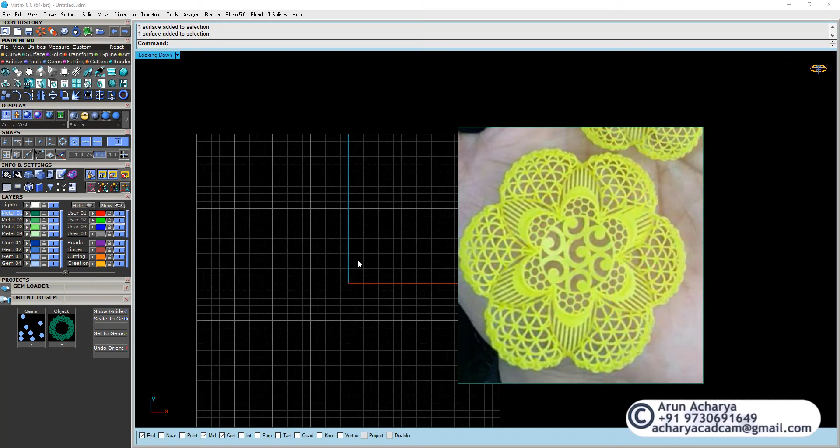So let's see how you can do such a design. All right, well, it's quite an easy design.

First of all, like every time we do, we have to fit it inside the measurement. So here the diameter is around 60 millimeter, or let's do it for 40. I don't know if it's exactly the same measurement, so I'll just move it to the center, and then I will scale it a bit.

Make sure it's touching all the corners. I'll scale it again from this view, and as you can see, it's almost inside the circle. So here it's a bit out, but that's fine, we're not gonna pay attention over there.

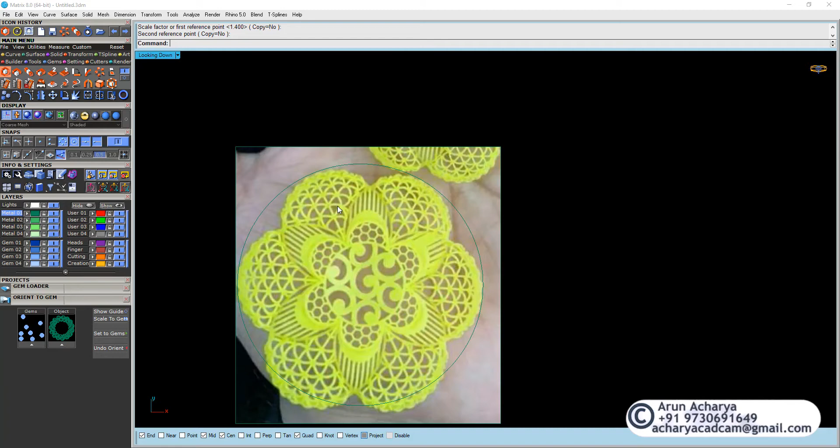The command over here I'll be using is smash, and then we're gonna use UV curve, or we might use smart flow. I prefer smart flow if it's more like a squarish surface, not a triangle.

For example, here it's a bit of a triangle kind of surface. So let's see, maybe smash would be handy over here.

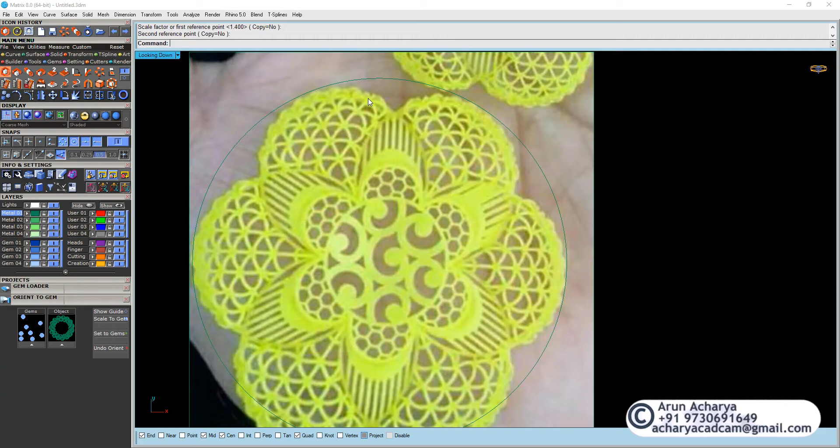So let's just begin. For the center design, we're just gonna trace it, the usual way we do it. I'm not gonna draw the actual design because I just want to make this quick, just to show you the technique. It's not really important to complete the design, but to show you guys which technique to apply.

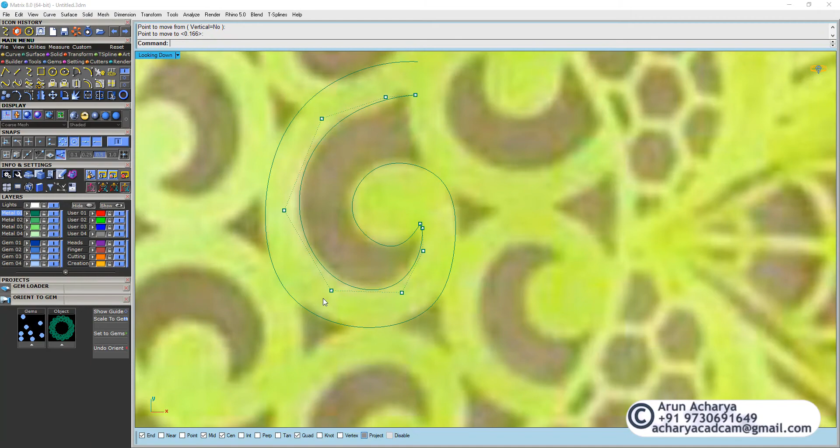Okay, so this will be a normal extrude.

I say that I don't want to do this completely, but at the same time I just cannot leave it looking ugly. So I take this time to fix it, and for me it's fine.

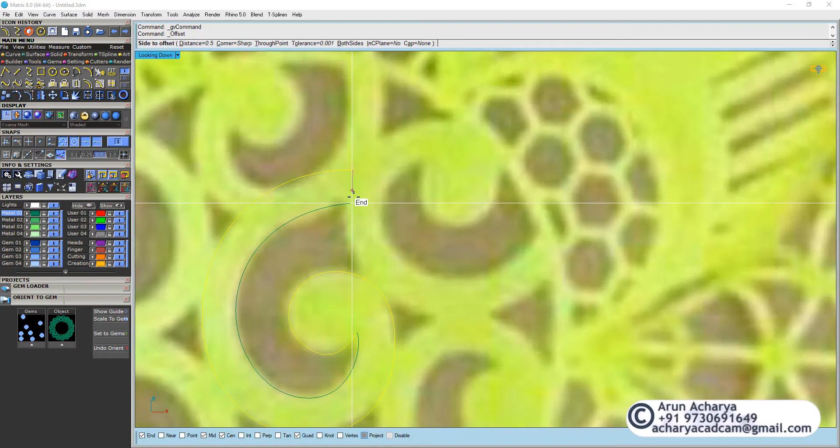I don't know how much is the distance here, so let's just check. That's around 0.8, so that's fine. A circle here, and you offset this around 0.5.

Now the minimum thickness on this design can be 0.25. Yes, you heard it right, 0.25. You can keep it 0.25, but you need to have a high quality 3D printer and a very good quality wax injector.

Even if you print this model on a high printer where it's printed in a harder resin, like one you can't cast, the only option is to make a mold. But sometimes you make designs where such thin parts are a bit difficult to get out from the wax injector.

So make sure you have, I suggest Yasui is the one I have seen. I've watched the performance of the wax injector. The one I saw was the ultimate one, a wax injector with the vacuum system, and the result was amazing. It was simply the best.

And again, the Yasui casting machine was the best. I saw the pieces, and the result was amazing. This tiny detail was perfect. Nothing beats Yasui so far.

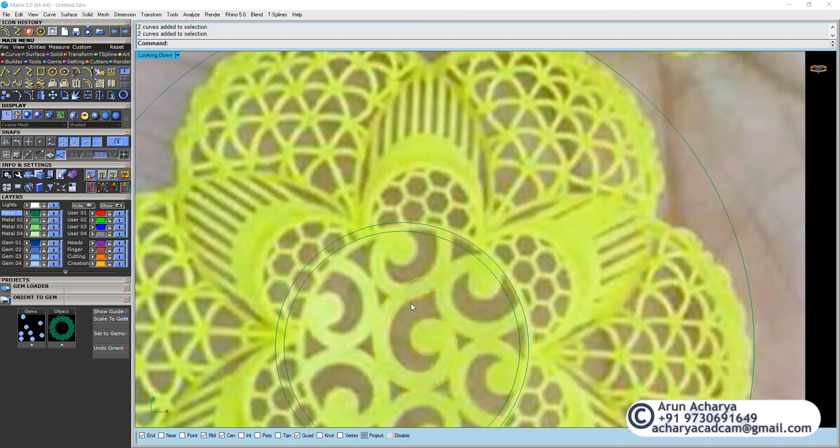I don't know if you guys know some other machine, but this is my view on these designs, especially very thin tiny details. If you guys know something else, do let me know. I will see at a near exhibition how it really works with such designs.

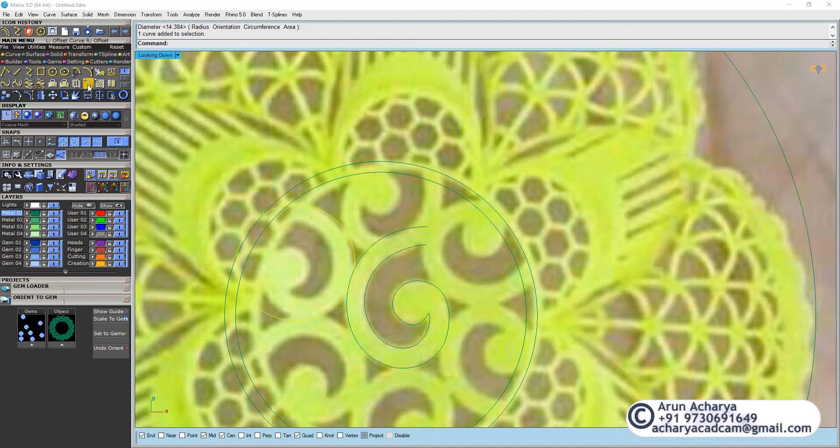Okay, so for the moment I'm just gonna do a round design here. I don't want to work on it much, so I'll just do an array here, not so much.

Alright, so we have the design ready. This is it, the first one we're gonna do with the surface. So the surface can be a sphere here, something like this, and you just scale it down like this over here.

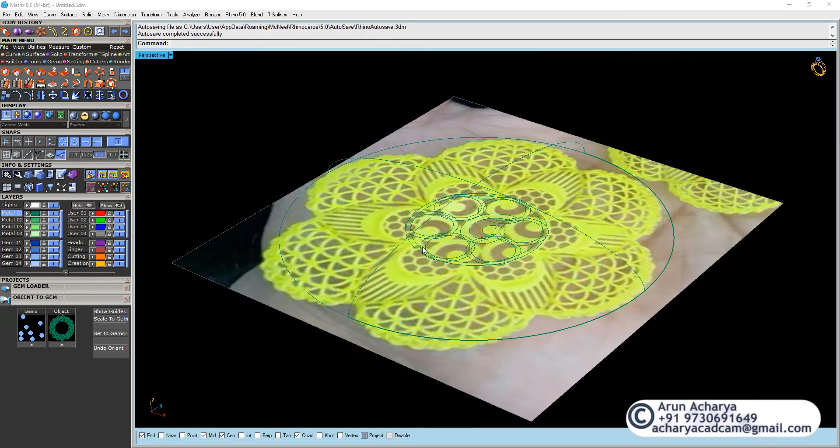Okay, the next step is to do a boolean and then just cut this out. I don't know if you are watching my videos regularly, I prefer to keep the edges on the side. This way I avoid trimming on the edge, but I see maybe I have an edge over here. I'm not sure, but let's see that.

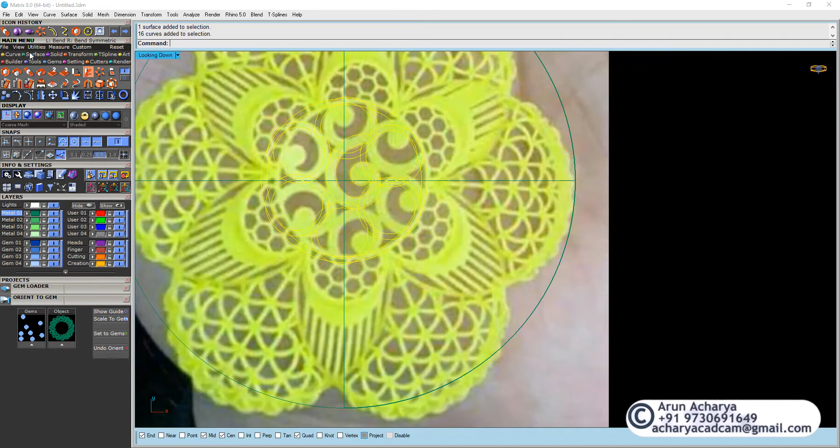Let's see. So just do a boolean here.

Everything is yellow here, and I really can't see what I'm doing. Sorry for that. So let's just hide this image. Yeah, now I have a proper image, a proper view.

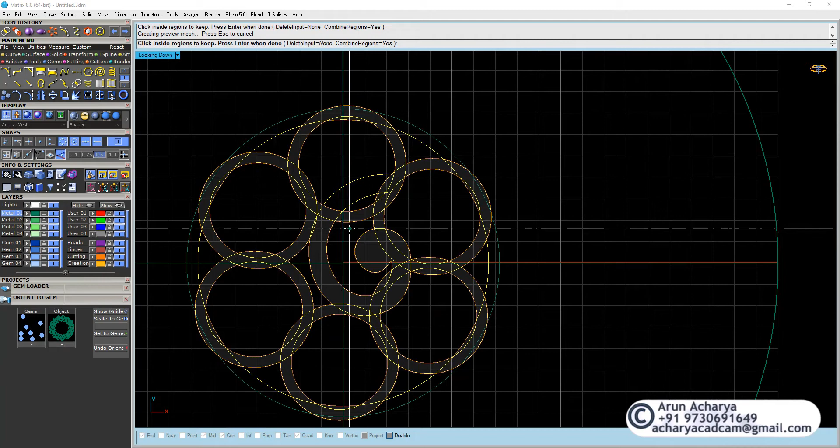So I'll select these areas where I want the design to stay. Okay, see, okay, yeah, there you go. So I'm just doing a quick design part.

Okay, I didn't select the option delete input all. So what I will do here is just copy to clipboard, undo, select everything, but just remove this circle and the surface, and delete this, and you paste it, so you don't really have to redesign everything.

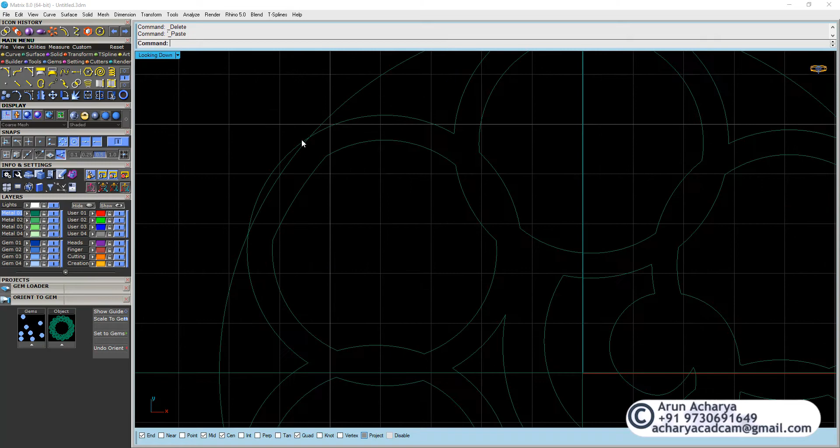And again the same mistake, so I'll just put all. That's it. Okay, so here's the design. I know it's not matching, but this is just something quick.

So once you have your curve, you can just trim this surface. Select the trim option, and I guess I trimmed the wrong side. Surface, trim the outside one. Yes.

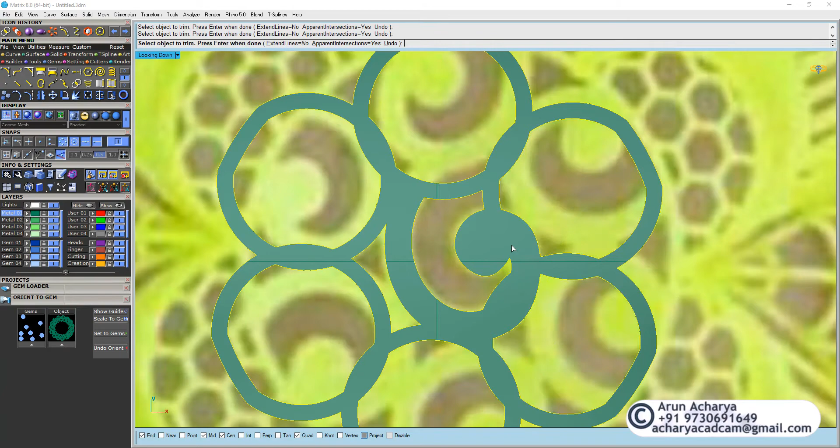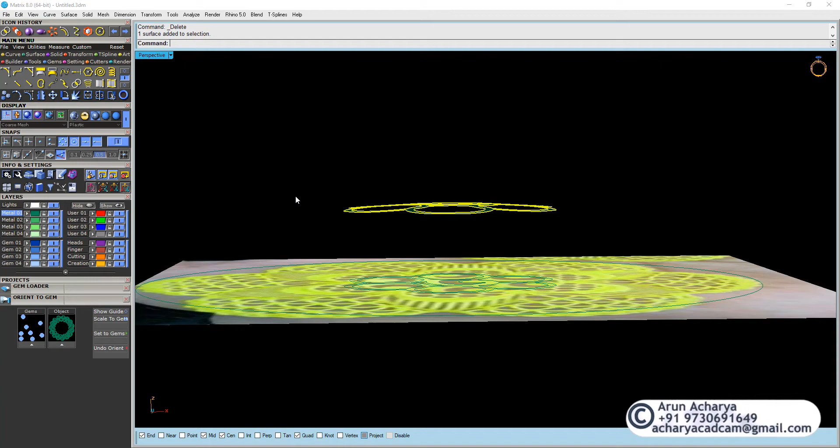Okay, so as you can see, I've used a trim, and the surface was a bit dome. So that's how you do a dome part. You make a surface, a sphere, you just scale it down, and you judge the dome how much you want to keep it. In case you want more dome, you just have to keep it a bit higher. Okay, a bit thicker, so you have a domed one.

Or if you still want to play with the points, you can still do that. So we can just shrink this surface, get some points on it, and you can raise those points over here. So I'll just raise this up like vertical and something like this. Okay, it's not really looking that good, but you can just do a scale 1D here.

Make sure the ortho is on. Okay, so you can adjust the dome even if you trimmed it. That's not a problem, and you can still see the design from the top. It's completely fine. There's no problem with that.

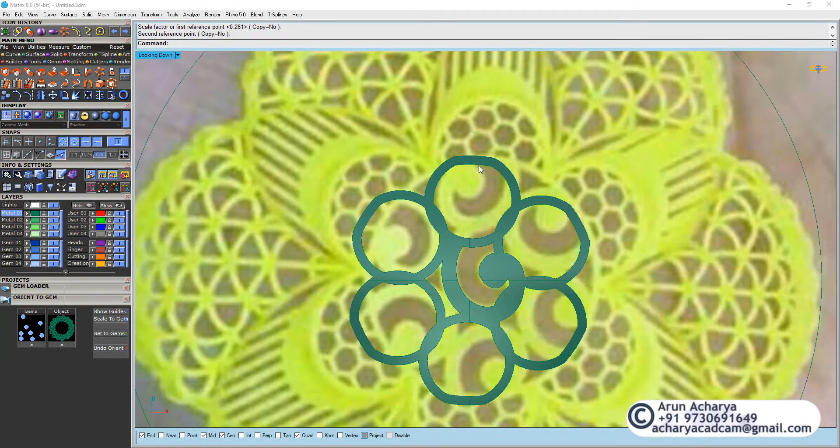Okay, so this is one of the options. So for the rest, you can do the same.

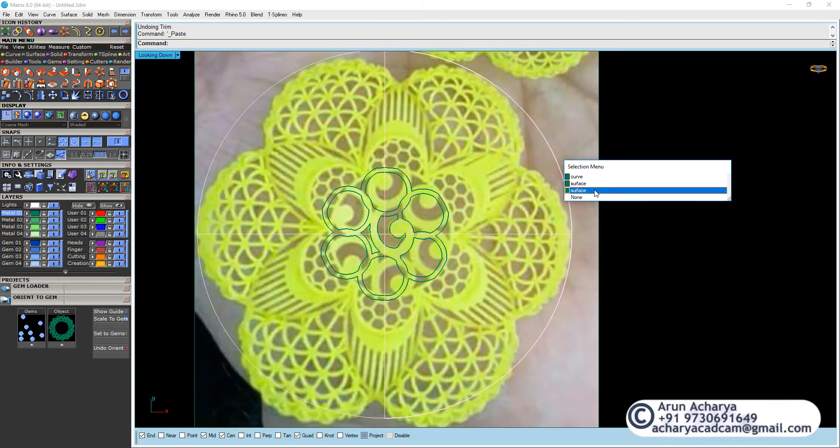So here what I want to do, I will just copy this to the clipboard, and I'll go back to the surface where we didn't trim it. So I'll use this as the basic dome shape for this design, and lock this one.

Alright, so this gonna be the same thing. Just make sure you have a curve here, you make another one. This pattern you can just draw this outside. Okay, let me show you how to do this.

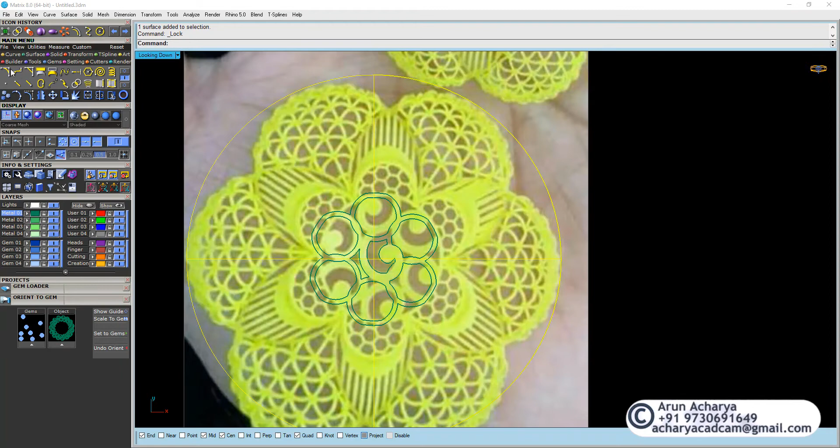Take a curve. Actually, I'm going to modify the design a bit, like, you know, I'm not following the same design, but just to give you an idea of how you can really get this on.

Okay, so I got this two curve here like in a guide, I would say, and then start point end to end, and can be here somewhere.

We do the same here again. See, start point and something like this. Okay, and the inner design, it's gonna be the same like I said earlier.

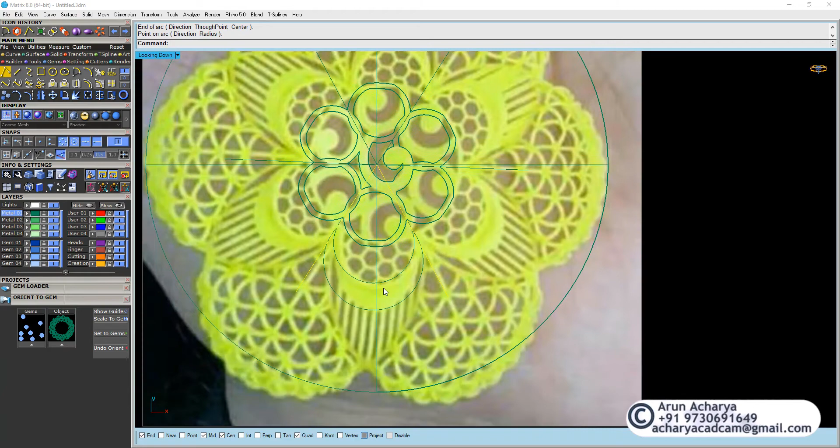So make sure you make everything inside this line, because eventually these are just an array polar, so just a copy. So we're gonna achieve that later on with the array polar, so you don't waste time doing each of them separately, and this one over here as well.

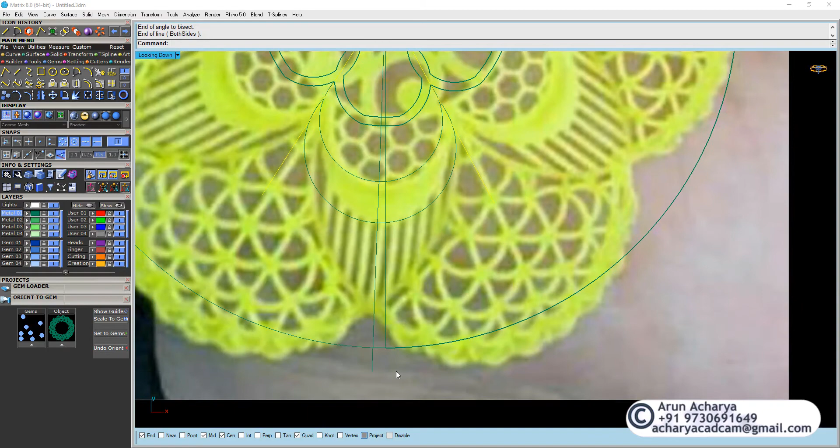So here I'm going to use a bisector line for another guide, so that is from here to here, and exactly this is the line here, and you can actually fix it in a proper angle.

So I'll just rotate this a little bit so it's going exactly down. Okay, I shouldn't have moved this one, so unselect, and yeah, that's it. Change it to red, so we actually don't select that often.

And a circle, sorry, an arc here again. Make sure you're using the guide. Now the image is a bit tilted, so that's fine. I'm going to use my guideline for my proper judgment.

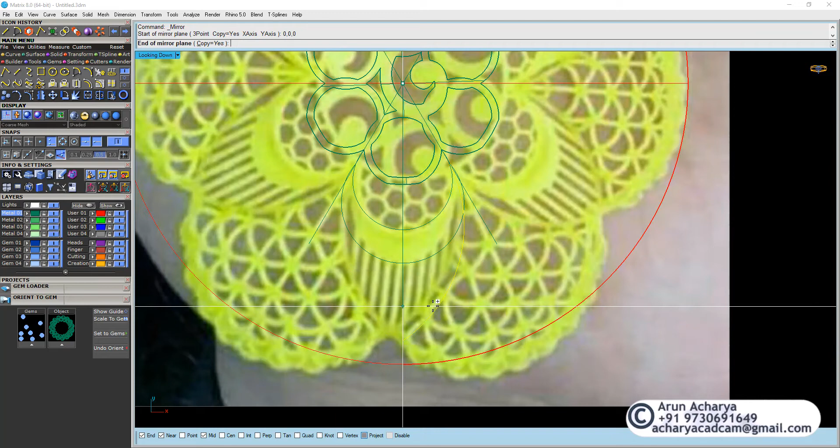So it's going to be like this, and you mirror this and you draw the line inside. So join them, you make a line here.

And you can offset. So as I said, 0.3 would be minimum, so I'm going to do 0.3 divided by 2, that's 0.15. And you can do the array on it, so let's just do array on this side.

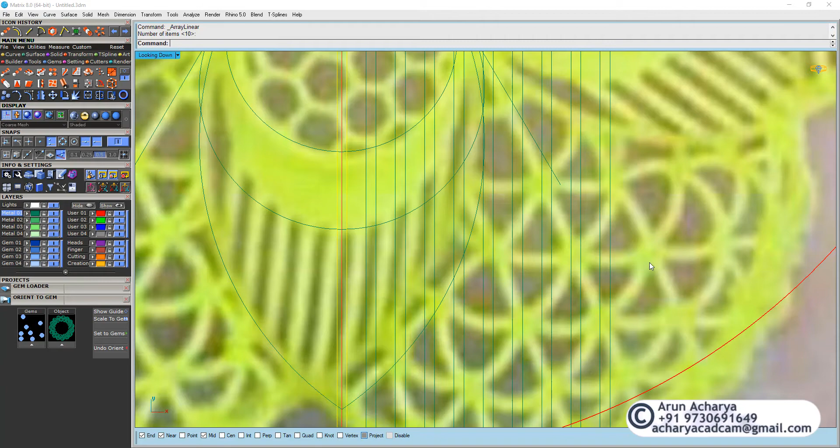Array linear would be fine. Number of copies is going to be 10, and we drop it like this. So the extras, we're going to delete, and yeah, let's just keep this line the same over here.

So now I have the surface, I have these two curves here, and I'm just going to draw one more curve, and I'll make it a bit dome. Okay, now for this surface, I would just draw a curve.

I'm going to rebuild this. For some reason I feel they're not in the right place, but let me just zoom it. Yeah, exactly, they were not actually. What is this over here? Okay, this is the arc, so just delete this one. I'm going to draw a new one.

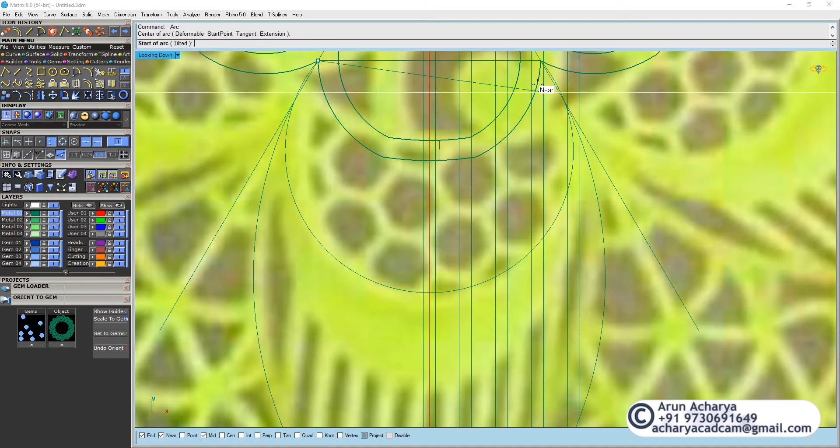Start point, so from the end to this end, and so somewhere like this, and start point again, and this over here. Okay, so we have a curve here, and I'll just rebuild this one.

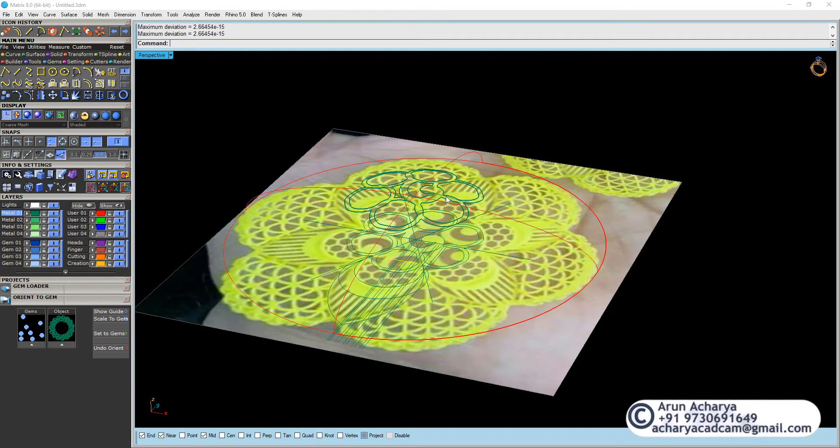I'll move this up. Okay, so here's the thing, I'm going to project this on the surface. Okay, something like this. Yes.

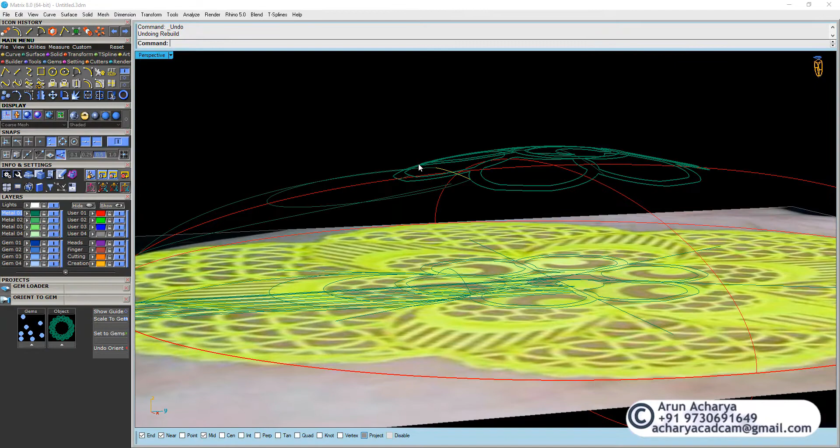And here's what I have to do again. Just rebuild this one and raise those curves up a bit, or you can keep them at the same level, in case you don't want to move it up, because eventually this is on a higher side, on a higher level, so we just cannot overlap this design.

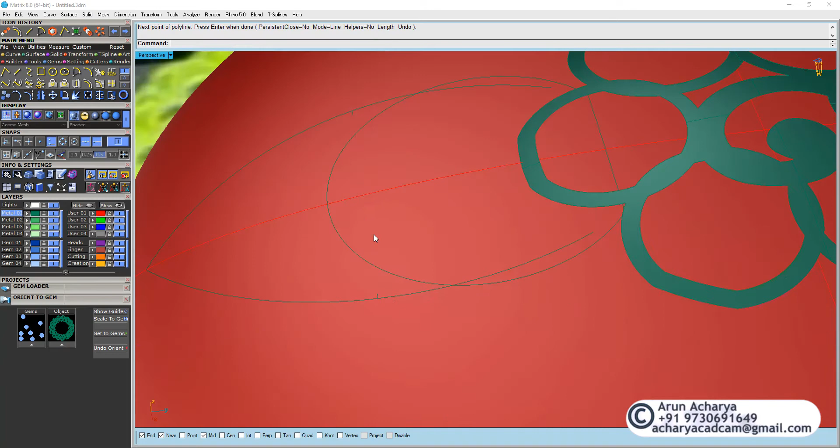Okay, so you keep this on the same level and you draw another line from here to here, somewhere here. Okay, and you rebuild and you raise it up so that when you do a sweep 2, this will be a bit raised.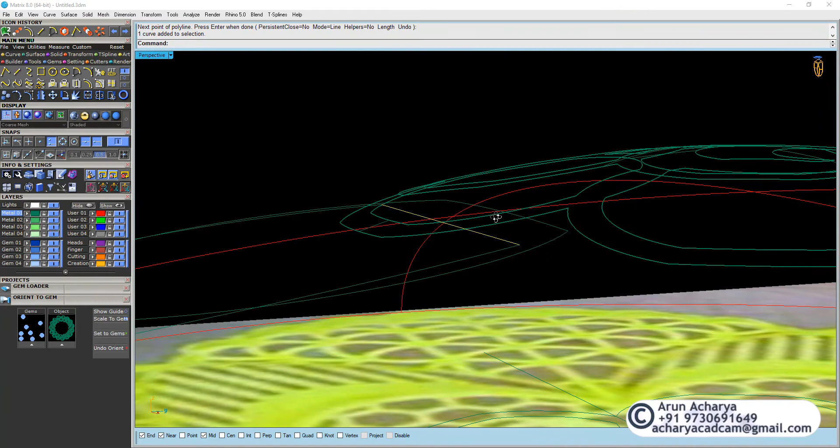Okay, so surface, sweep 2, select. Okay, I need to explode them. Explode, sweep 2, click here, click here. I think I selected the wrong one, so I'll just draw quickly a line here. Alright, forget about that, that's fine.

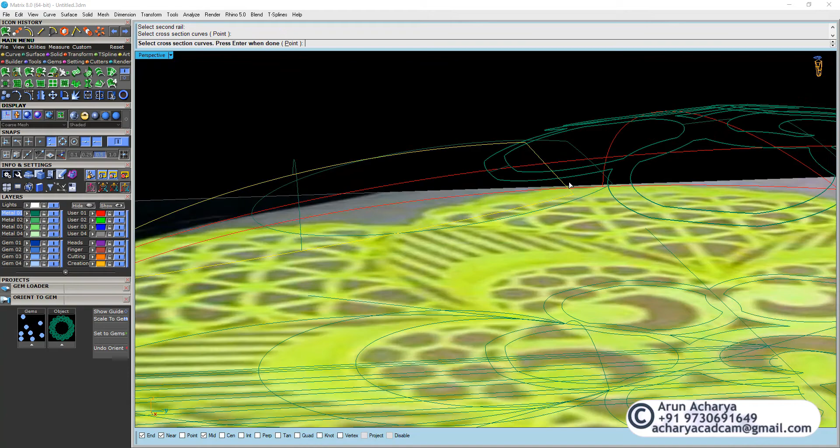So a surface here. Okay, I'm doing a sweep 2 again because I made a mistake. I selected this first. I should have selected this at the beginning, then this, and then point, and then in the end. So this way I'm going to have a different surface.

Okay, and for some reason, if you're not happy with the shape, you can always change that, but right now I'm just showing you the technique. So let's focus on the technique and not on the actual result. You know, you can just raise this curve, the section, and maybe you can do a sweep 2 again, and then you will find a good result.

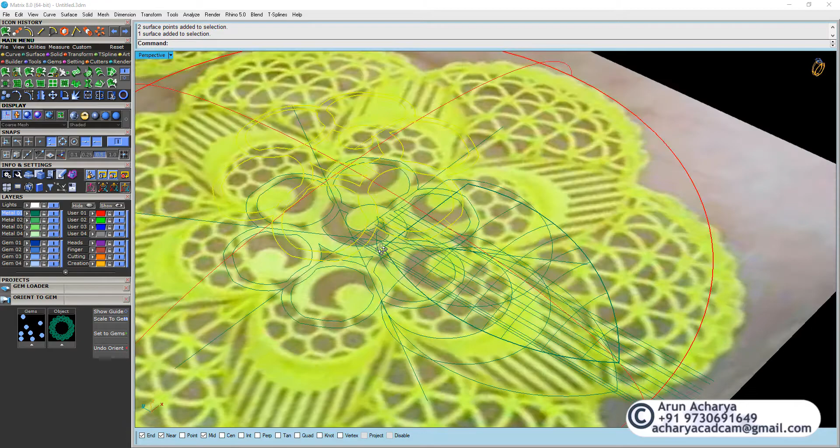Okay, so the story is actually that this is a bit dome. I think it's a bit more dome if you look at the wax piece here. Okay, but that's fine, you can control this. You just need to know how you can do such a design.

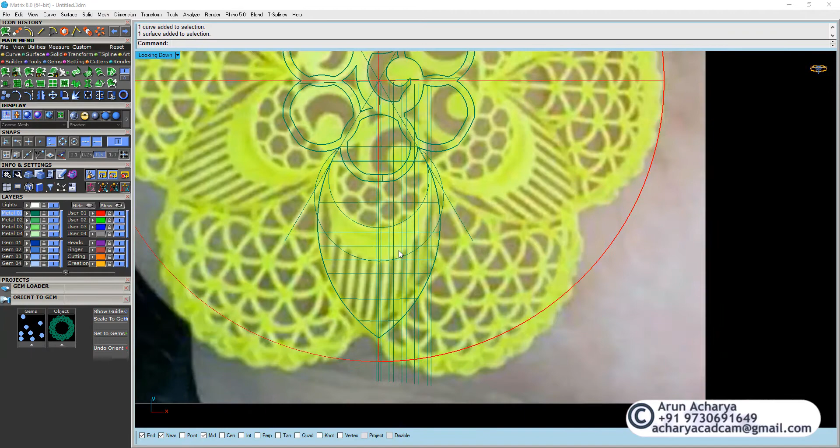So once you have the surface, you just have to draw the pattern down and project it on top, like we did for this surface. Okay, so everything is the same. So I'm going to use the same pattern, like an easy pattern, just to be quick.

Okay, this background is okay. Let's just do the 2D part now. So once you have this one, I just mirror this on the other side.

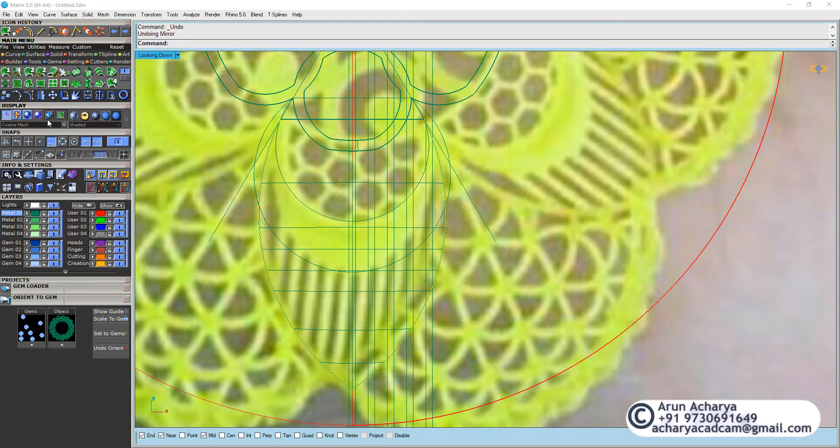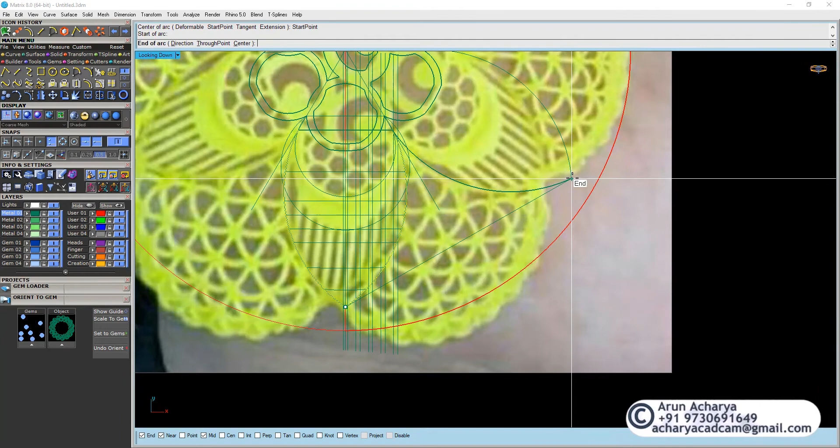Curve. Okay, alright, so we have the other pattern here, and then we'll do another surface that is from here again, so something like this. Let's see our actual curve here. So project.

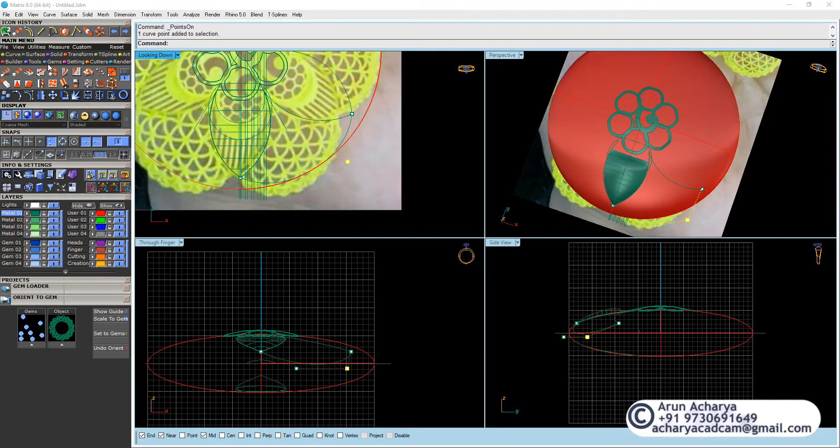Oopsie, it's out of the sphere, so not a problem. We can just rebuild this and bring it inside. Project again. Okay, there you go, that's much better.

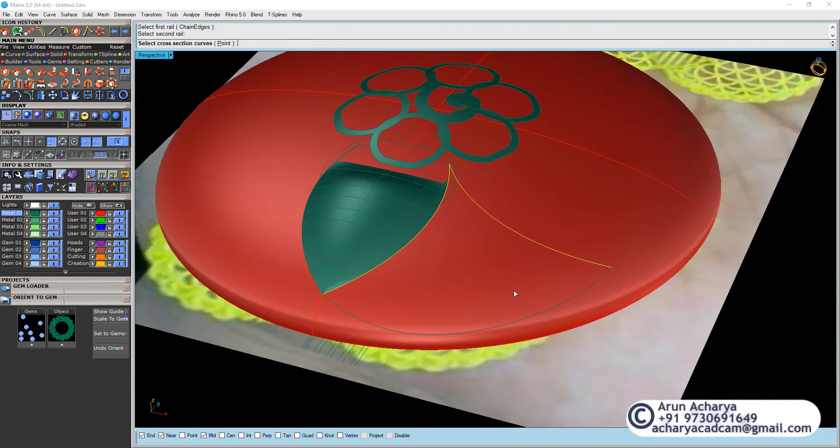And you have this shape. Alright, so what next? You do a sweep 2 again, like I explained earlier. One here, one over here, and one over here, one here, and this one. There you go, perfect, so you have the surface over here.

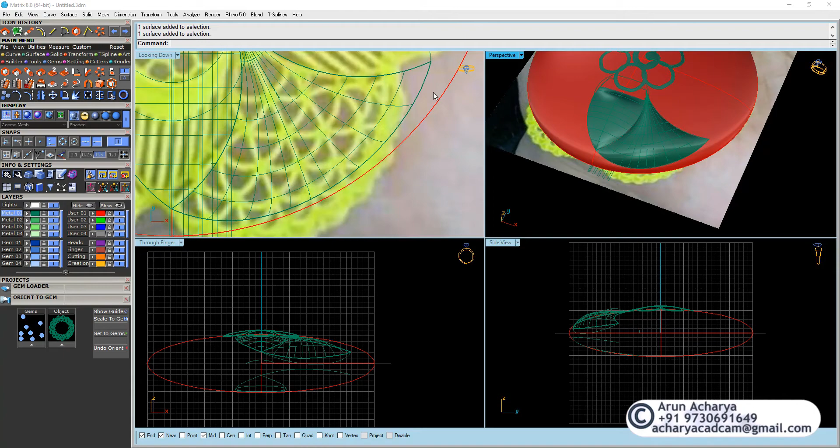Okay, now let's try to smash this, because actually this curve over here, they are much more organized, so we cannot just project them, and if you see, they are going a bit down as well. So I have to try with smash.

Continue, yes, and this might give me a result or might not give me a result. So here we have this curve here, I'll just move this aside around 20 millimeters, or 25, and now we can get rid of the background. Actually, it was disturbing me a lot, so just hide this one.

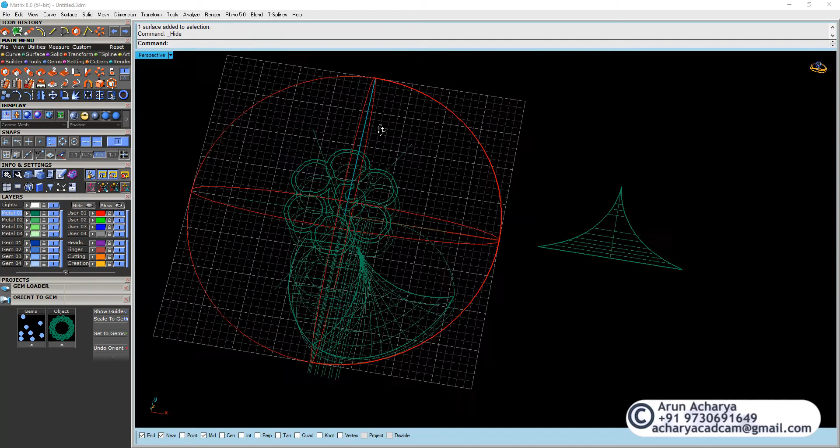Obviously this is an advanced level, so if you guys are missing few points, please don't blame me. You need to be on the expert, on the intermediate level to understand what I'm doing. If not, just go back and watch again carefully.

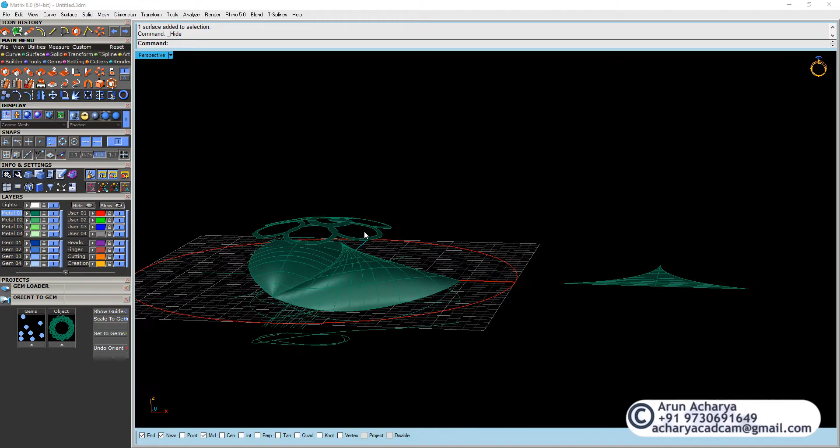Okay, so we have this surface where I'm gonna just project this one, this one which is double, copy down, we just delete them. And this one especially, I'm going to use a smash command. So I did a smash on this one, and this is what we got.

And I'm going to try a smart flow on this one, but before I do, I just want to make sure the curves are good when you flow them on a surface. So how do we know if it's good or not?

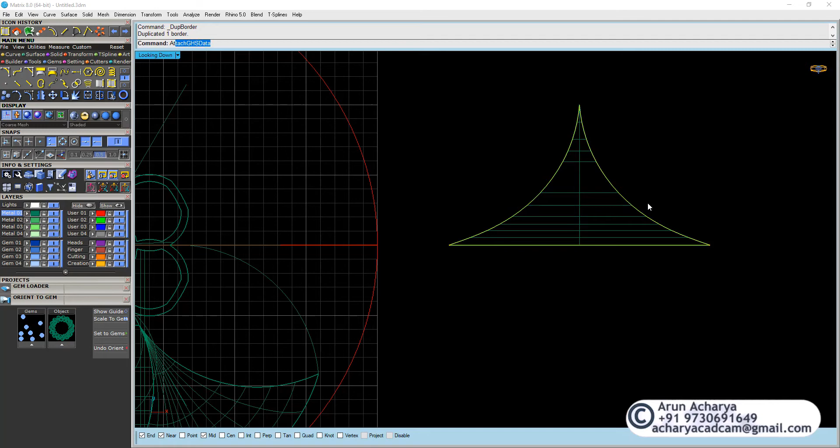So I'm gonna do a quick hatch on this one. For the hatch, I'll need a duplicate border, and once I have this curve, I'm gonna do a hatch, and I'll use this one, the grid one, and the scale should be somewhere around 5, I think. 5 is good, yeah, 5 is good. And you explode them, so once you explode, it converts into a curve, and that's what we want.

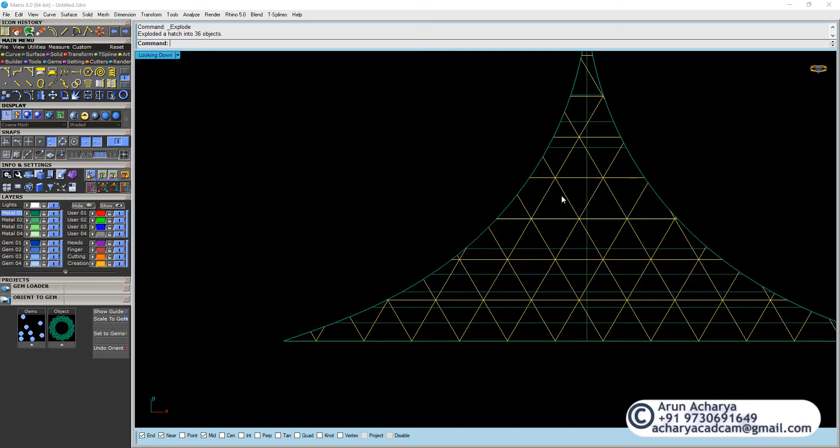Okay, so here's what I have to do. Actually, I have to trim them. I'll just hide this one. I have to split them against each other, so I don't know if this will work, but let's just try.

I have to group them, so I know that this is the first batch, so I'll just group this and select this all, and I'll just group this one. So split this with this, and split this with this.

So let's just ungroup and see the result. Yeah, perfect. This is what I wanted, each of them is separate, and yeah, perfect. So just rebuild this with around 4 points.

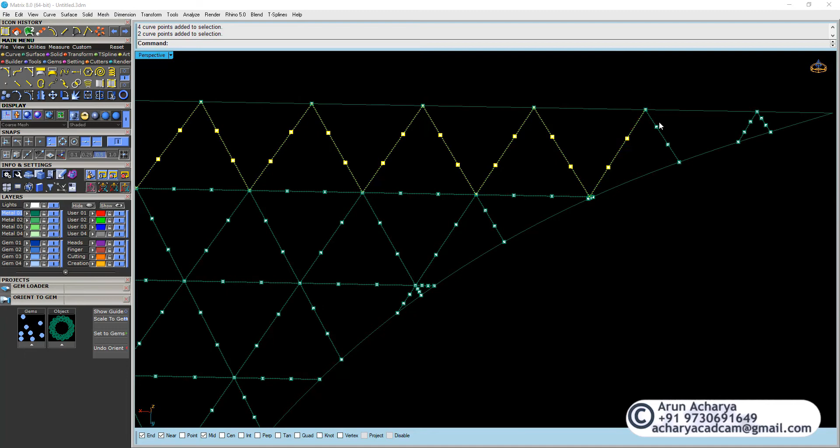And here comes the tricky part. You just have to select these 2 points, the one which is inside, not on the edges. So you select these 2 points, and you do the same over here. And you can flip the angle, and you can select more points.

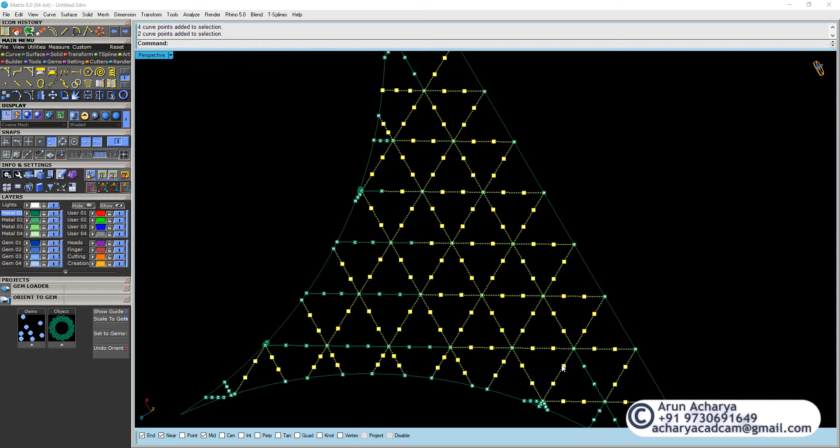Okay, and we just raise this vertically around 0.3. Yeah, so we get such a pattern. Okay, I know there are a few curves which are still flat, but that's fine.

We just need to do a test. So bring this back surface, and let's change the color. And here's what we have to do. We're gonna do a smart flow now using these two surfaces, and we'll see the result, how it's reacting to the surface. So the base surface is this one, and the flow is this one.

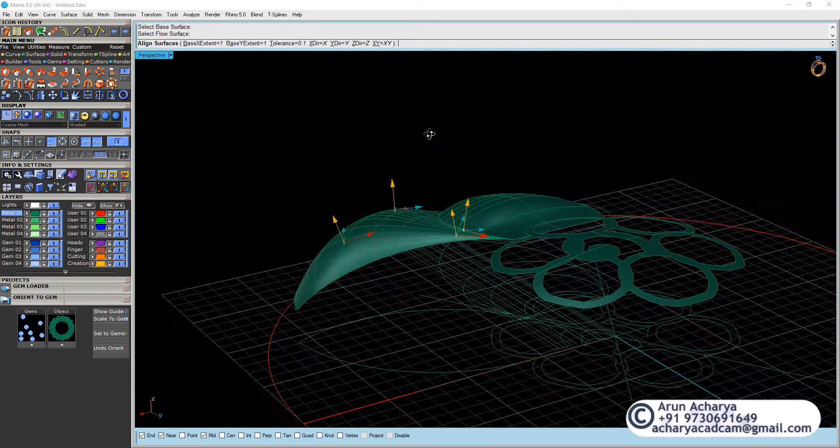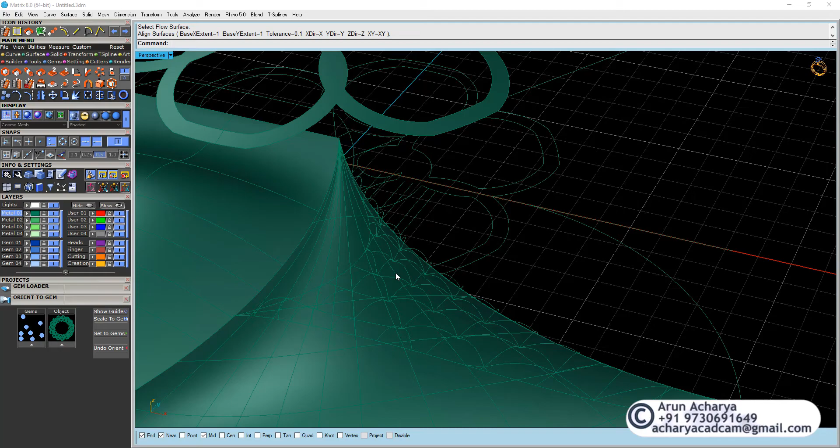Okay, so for the moment I just press enter, and okay, it's good, but it's not good. As you can see, this curve, if you do this on the surface itself, it would take a hell lot of time. So with the smart flow it was actually a bit easier, but the thing is the result is not what we're looking for.

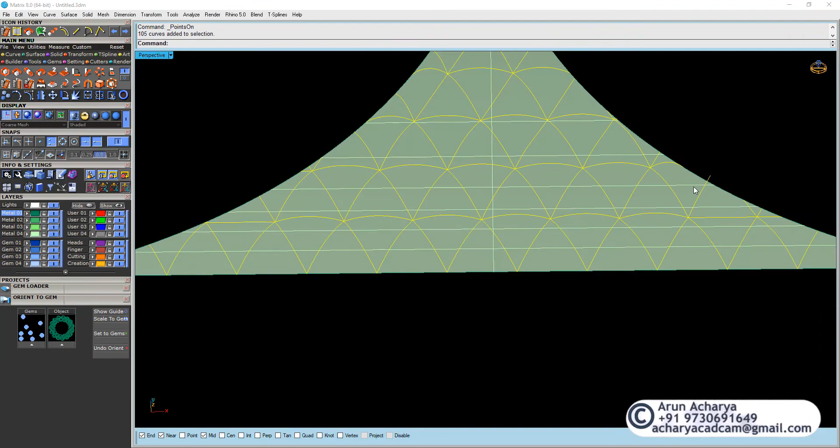So I'll just try again, and I'll see what would be the best corner. It happens to me, especially when there is a 3 edge on the surface, I don't really get a good result. Okay, so well, over here there should not be any reason not to achieve a good result, but let's see. Maybe I'm doing a mistake here. I really don't know.

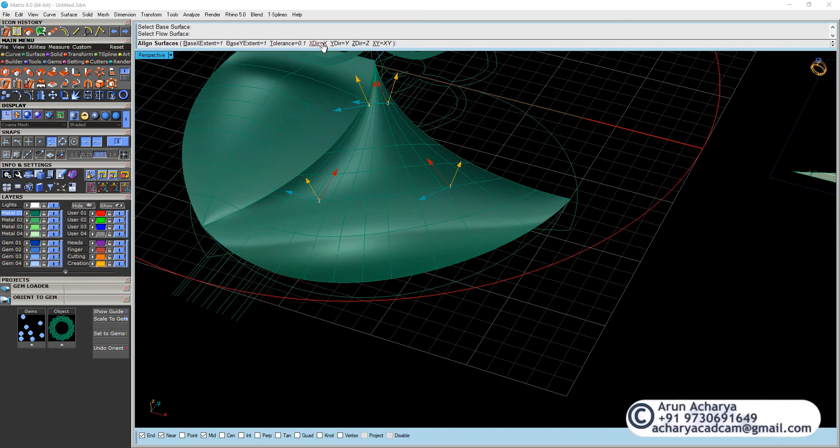Let's try with this corner. No. Or maybe is it the shape or the position? Okay, let me change something here. Flip X. No.

Smart flow rigid. No. Smart flow break. I'll just do a flow along surface instead. Select objects. Yeah, enter. Select the base surface. Select target surface.

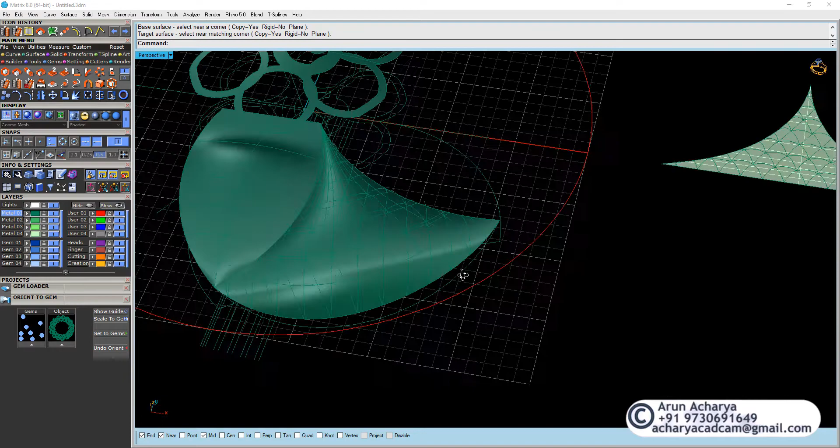Wow, this is what happens. Okay, so I got the result, as you can see, and I'm quite happy with it, but I was trying to do this with the smart flow and I failed, but flow along surface was perfect. Okay, so ultimately you got the result, what you actually wanted to do.

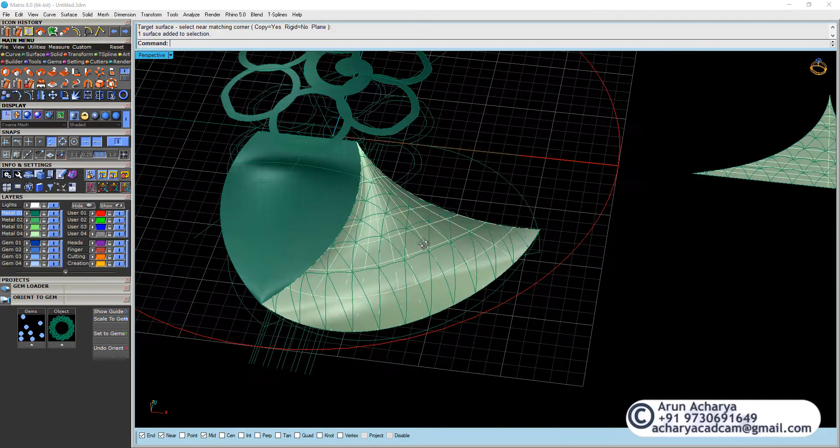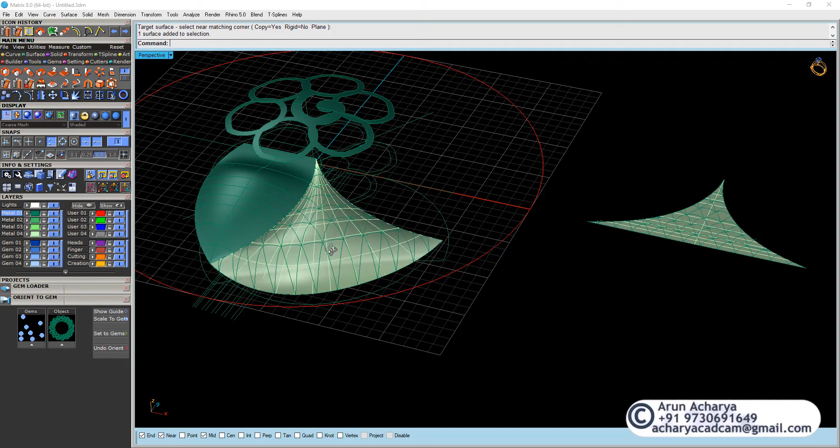So once you have this result, you can play here, do any kind of changes. But this is the best we can achieve if you have a surface which is a 3 side edge. It's not squarish, so sometimes it's a bit hard to wrap something around the surface. So this is a very good option. Smash is very handy over here.

Alright, hold on a second, I'll just change the color here. Okay, so if we want to select this curve which we just projected on the surface, we're going to use the command Select Last. I hope it works. SELLAST, enter, and there you go - blue color. Okay, that was the surface, not the curve.

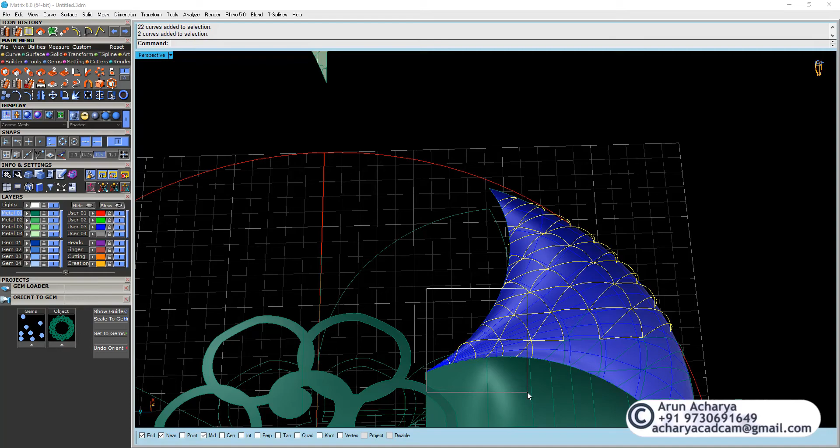Alright, fine. So just do a window selection, look for a better view, and select them randomly, and once you do that, switch to another color. So this is what we are looking for, and I hope you understood the technique.

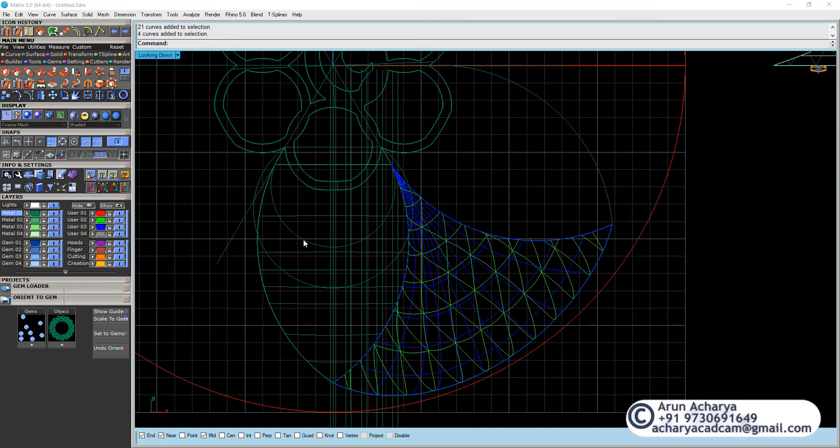Now let me just do something over here, let me just draw something. But before I do anything, I just want to lock all these curves which I'm not using for the moment, so everything is locked. And this is the curve, this is the other curve, I hope it's the down one. Let me have a look. Alright, I lost my selection, it's fine.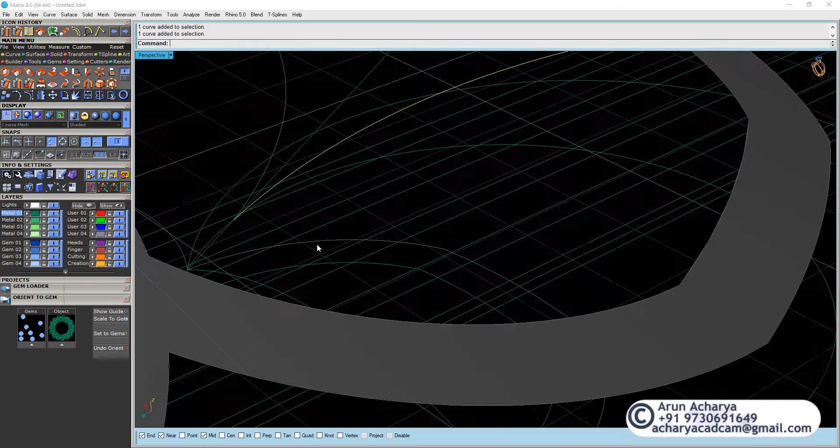Okay, this is actually not touching over here, so what do I do? I can just select this curve here, for complete selection. That's fine, I think that's fine for the moment. And we'll just select this and we'll just mirror this on the other side.

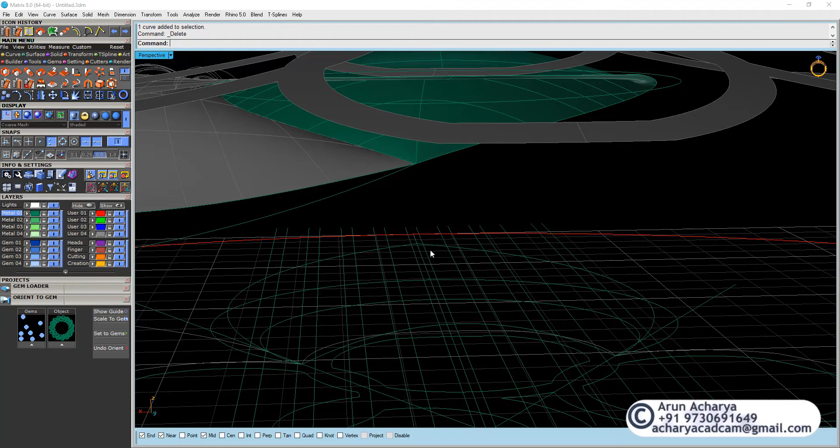We're gonna delete this as well, and we select all together, and we're gonna do a curve boolean. So curve boolean, and here it is. Let this be a complete selection, so just do this a complete selection.

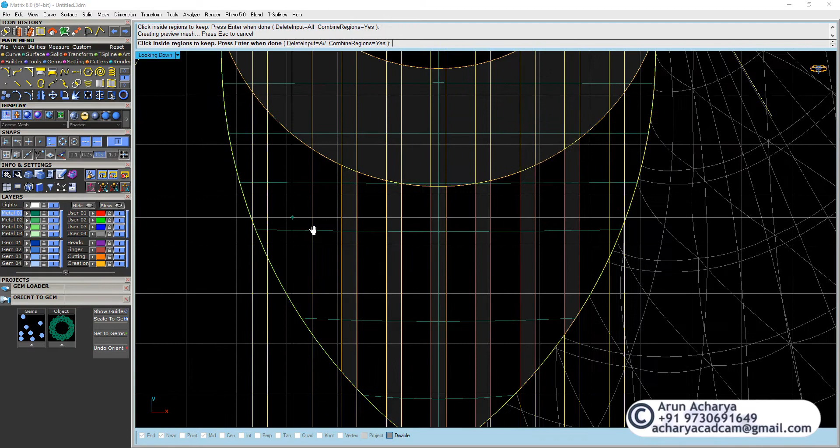Alright, and then you select this. This is the simplest design. Oh really, seriously, I'm missing one curve here, but okay, my mistake, but that's fine. Alright, so here we are done with the design, and I'm gonna use Delete Input All.

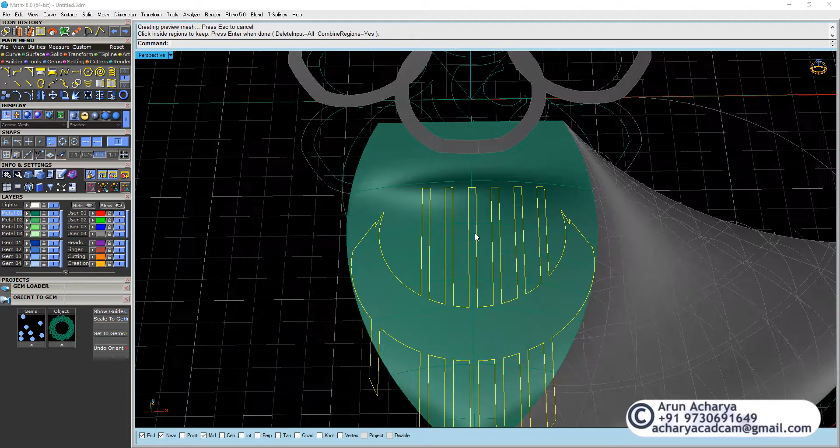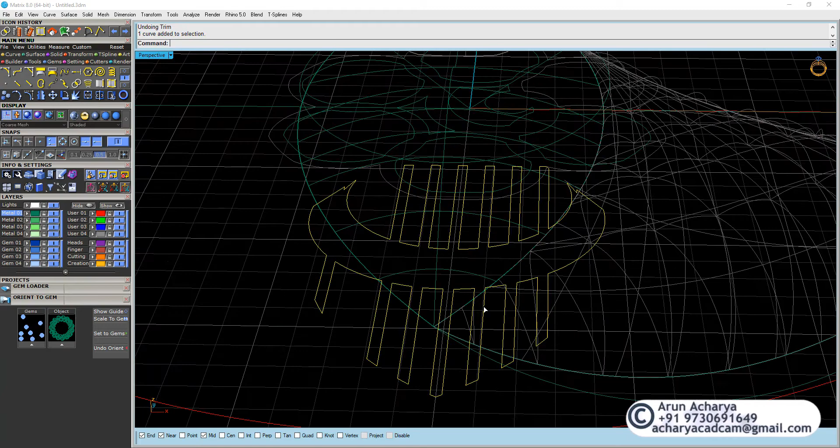I'm gonna project this on this surface, or I can just directly trim this out. There you go, so that's how you do this. I don't know why there's this problem with this one, but let's just trim again if it doesn't work. Okay, I have no idea why is this splitting into weird surface, but then we can still project this.

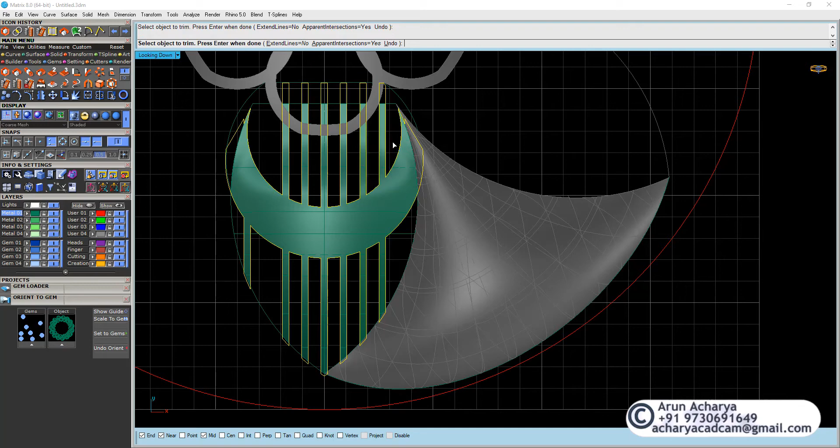Yeah, that should be fine. Just scale it a bit and let's see what you have here. Yeah, now it's better. So I missed one curve here, but that's fine - you don't do mistakes, no, you learn from me. You learn that's what you should be taking care of. Alright, so here we are.

We have this surface, and then we have this surface with the curves on top. So what we're gonna do, we're gonna unlock, select this curve only, and this curve - they're gonna be a pipe. So I'll do a pipe on it, diameter 0.3, enter, and you can see the pattern is ready. This along with this one, we just gonna trim this out.

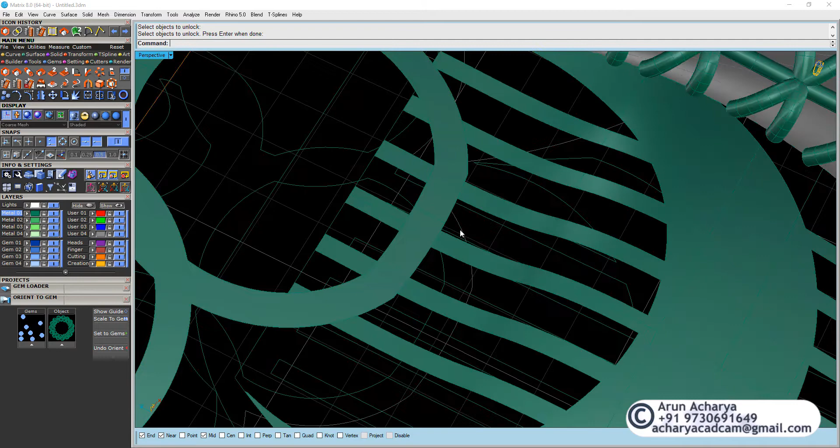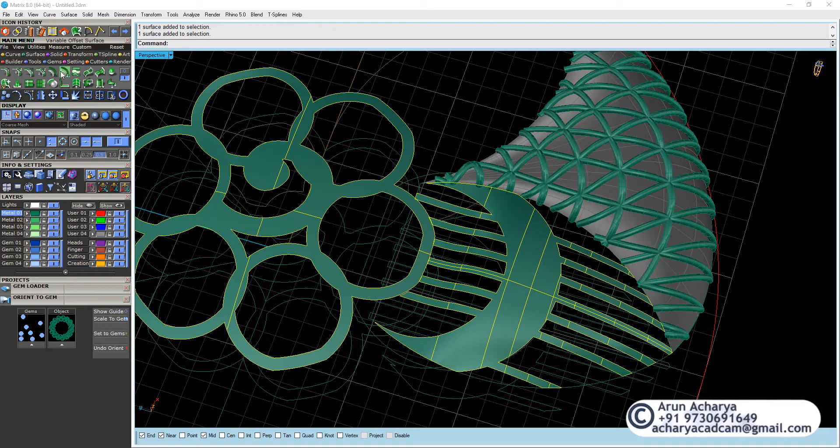So unlock selection, this as well, and trim the internal surface over here. Click, finish. And finally we gonna just offset this surface, offset, solid option, yes. We'll do a distance of 0.5, enter, and that's it.

Okay, this guy and this guy, they should be piped as well - 0.4, just because they are on the edges, and with the rounded option, yes. So we're gonna use a rounded option just to have a good finishing over here, and this one goes the same as well. So everything looks good so far.

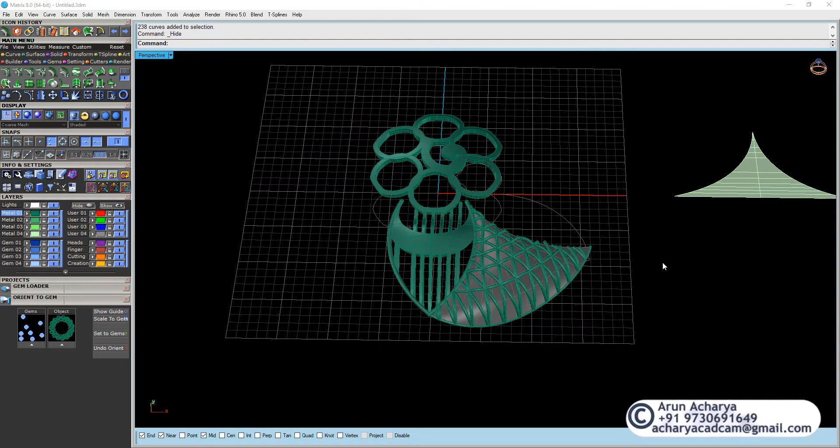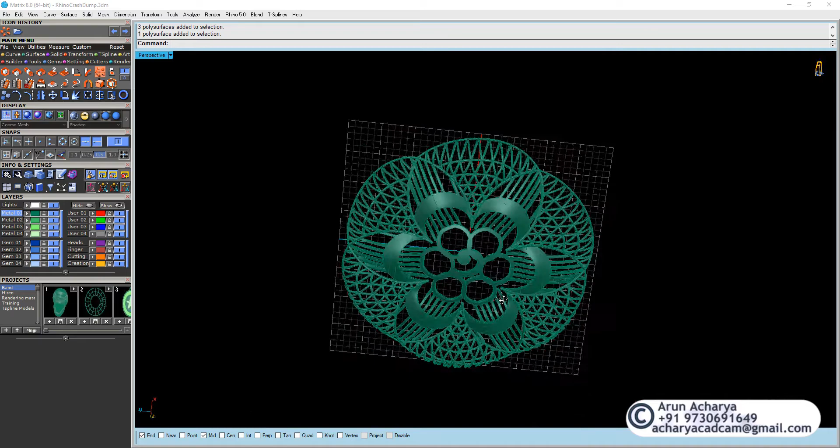Let's hide all the curves, get rid of this surface - we don't want any surface, so unlock everything, the surface and the curves to hide, and the final step is to do a polar array, and this is what you get. So that's it. I hope you guys enjoyed and got to know some tricks.

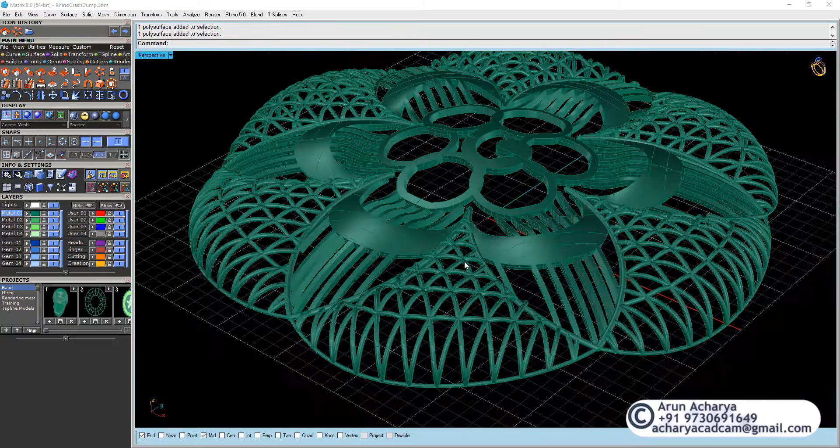There are some errors, as I can see, like these are not matching, but that's fine - we were just discussing how to get this done, the technique, right? Otherwise there are some errors, for example these edges, they should have been up a bit. So okay, this can be fixed. You just have to offset the surface both sides, and that should solve the problem. Otherwise it looks good to me.